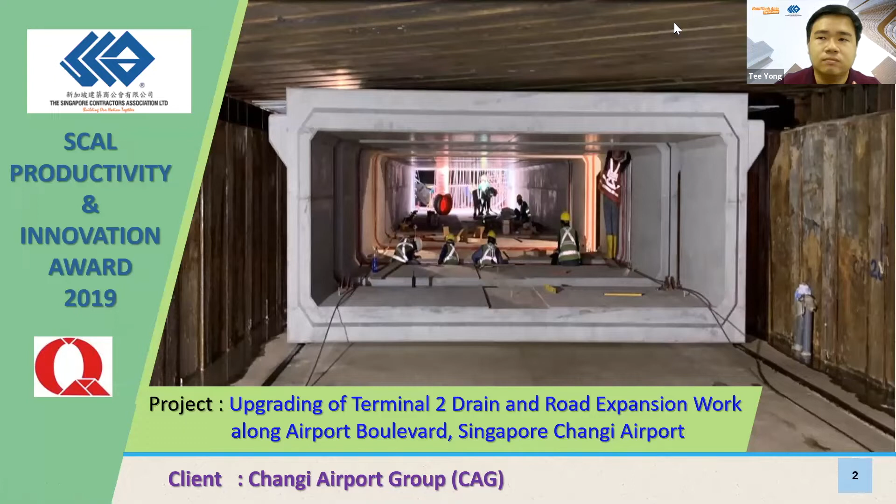So this is the length of the box culvert, which is about 51,100 mm across, going towards the direction of the airport and the upcoming Jewel during that time.

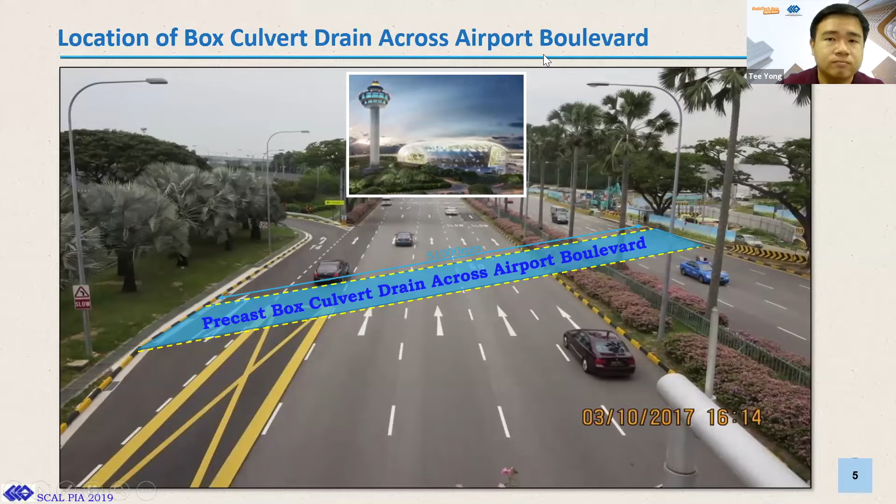The first initial method was using the consultant proposed method, which is the conventional way to construct. This design consists of a lower part precast box culvert followed by an upper part box culvert installation. The top of the culvert is actually higher than the existing road level for this design.

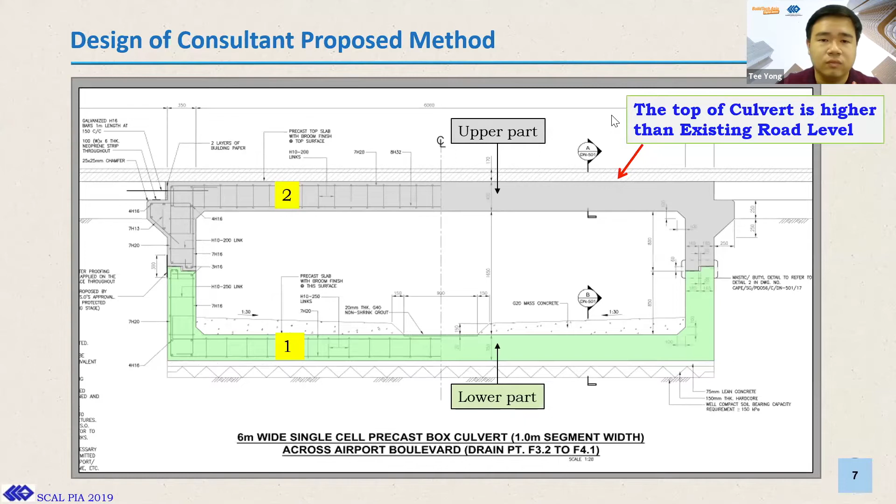Using this conventional method, we do the installation of temporary decking, followed by removal of decking for excavation, and then proceed with excavation to the required level. Then delivery of the lower portion of the box culvert, followed by backfilling, and then installation of the top section of the box culvert.

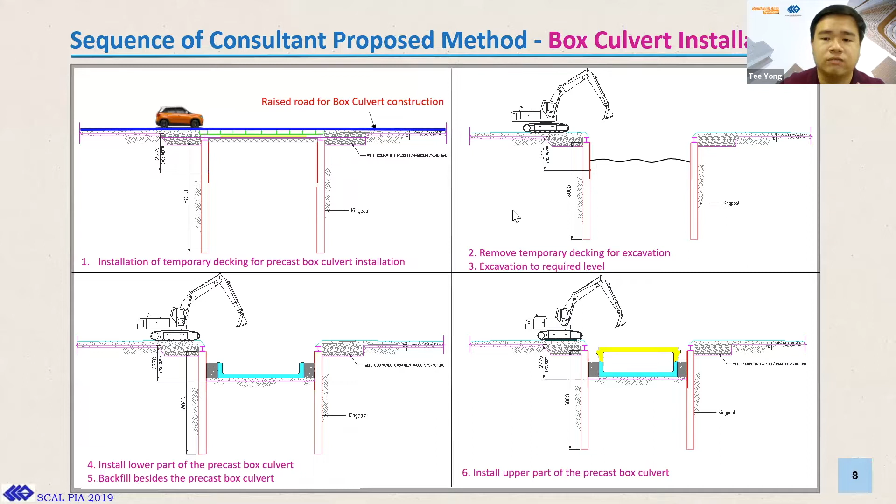Next, we proceed with placing the back decking system to open up the lane for traffic, and then laying of premix over the decking. Then we follow by removal of decking and premix to continue work, and backfill to the approach slab level.

During this portion, it is the most intense and time consuming, due to the opening and closing of traffic to allow for the next day operations. So this is part of our constraint for this project.

On the last portion, after completion, will be the removal of the king post and steel plate, followed by installation of the approach slab, and then the reinstatement works, which consists of milling and patching to the proposed level.

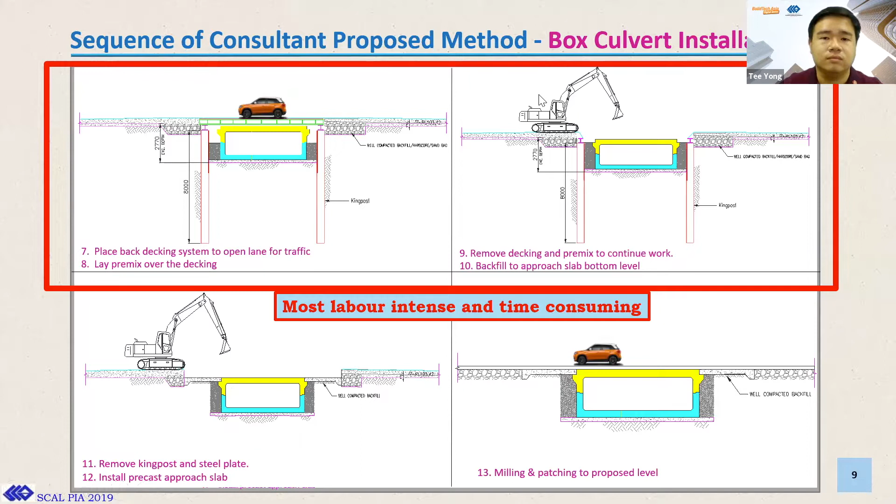Okay, so some of the challenges that we are facing - we have 4 main challenges if we use this conventional method to construct the box culvert along this Airport Boulevard.

First will be the repetition works, which require us to remove and reinstall back premix and decking, as we need to follow the permissible lane closure and lane opening timing to maintain the traffic flow.

Next will be the allowable lane closure timing, which is restricted for us. For day works, we are only allowed from 10 a.m. to 4 p.m., and for night works, we are only allowed from 1 a.m. to 5 a.m. So due to all these restrictions, there is a lot of repetition works required during our construction.

Next, if you look at the layout plan, this drain alignment is actually not perpendicular to the existing lane. So by using this method, we are affecting not just one lane in order to construct one box culvert - constructing one box culvert actually requires us to close more than 2 or 3 lanes. The last point will be the emergency lane opening.

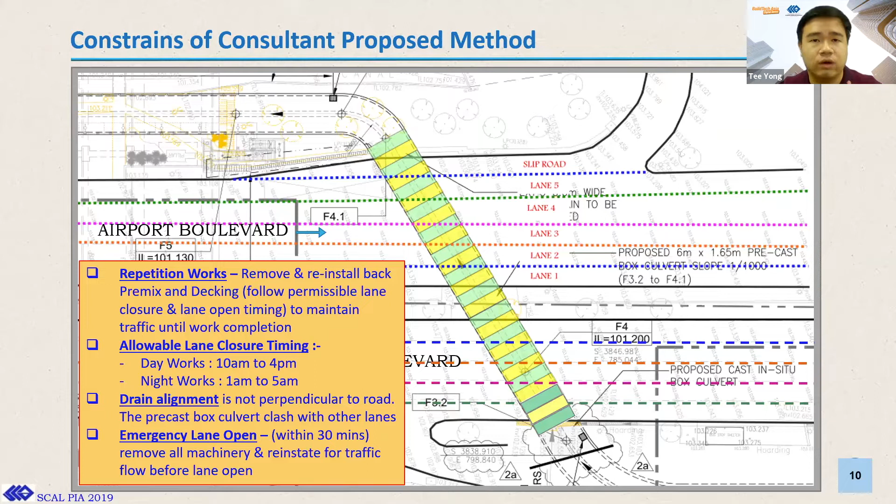We actually have to open up the lane within 30 minutes in case of emergency. So removal of machineries and reinstatement work for traffic flow before the lane opening will be a big challenge to us if we continue to use this conventional method.

So we have plotted a graph to analyze our challenges. In terms of method, if we proceed with the conventional way, the impact will be due to the small work window allowed by our client. In terms of environmental impact, we are only allowed to close 2 lanes at any one time. So this method will not be feasible for us.

In terms of machinery and manpower, it will also be a challenge, as this method requires us to do a lot of repeated steps for opening, closing, and reinstatement work, as we need to reinstate the top layer before we are able to open up to traffic. So all in all, if we proceed with this method, there will be impact to the existing traffic and also operations going to Changi Airport and the upcoming Jewel during that time.

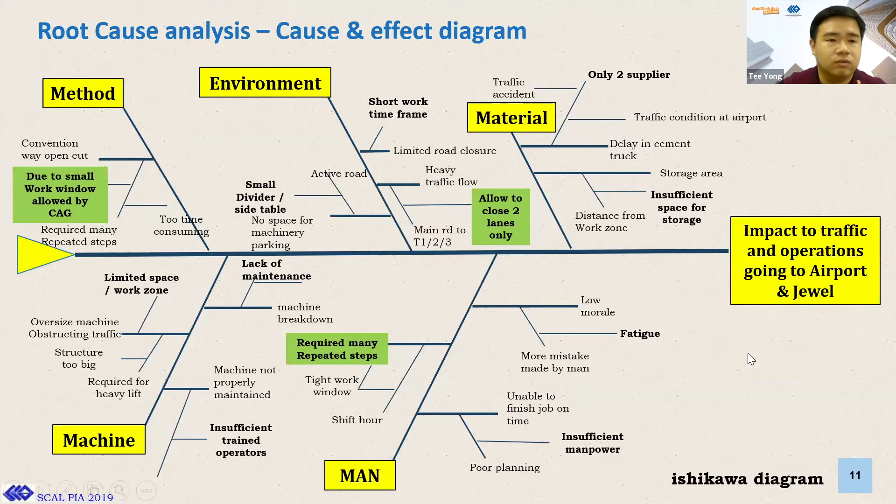So we analyze the root cause. We input 4 main points mentioned. The root cause will be restricted work windows given by our client, as this Airport Boulevard is a very important stretch going towards the airport, and for these works we are only able to close up to 2 lanes.

Due to the repetition works, road closure is also a big challenge to us, and we are also subject to airport emergency - we need to evacuate within 30 minutes so as not to affect traffic flow. So all these 4 main points are the main challenge for us, and the undesired outcomes will be delay to the upcoming Jewel opening during that time, and we will be facing LD from client and poor productivity.

So we have come up with a solution, which is to abort the conventional method and avoidance of above ground works and explore an underground method. What we have come up with is an innovative method, which is the pull and rail method. By using this method, we have no restriction to the 24/7 operations. So we are able to proceed with the excavation works and the installation of precast, without being affected by the restricted work windows and closure timing.

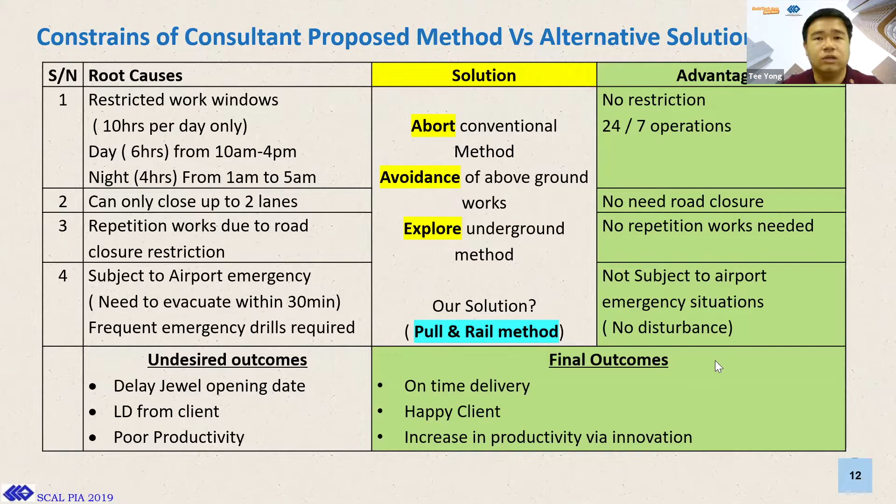So as mentioned, no need for road closure, no repeated works, and not subjected to airport emergencies. And the final outcomes will be on-time delivery, client satisfaction, and increase in productivity through innovations. So let us go on to our innovative method.

So this is what we have come up with, which is using this pull and rail sliding method for our full cell box culvert. The previous method was actually a lower portion and upper portion precast box culvert, but this time round, instead we are using a full cell box culvert, which also helps us increase our productivity.

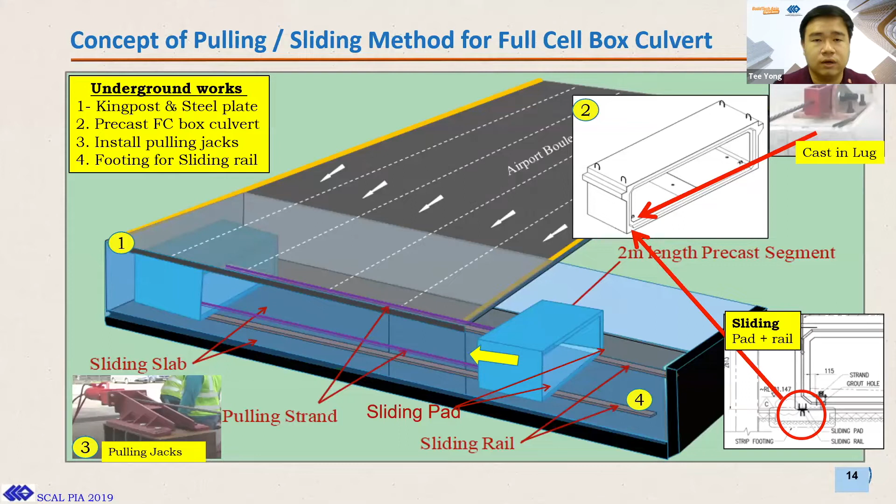So the first step will be the installation of the king post and steel plate, followed by number 2, the precast box culvert delivery to site to the receiving shaft, and below the ground, we will be doing the installation of the pulling jack and preparing the footing for the sliding rail. The next few slides will explain how these things work.

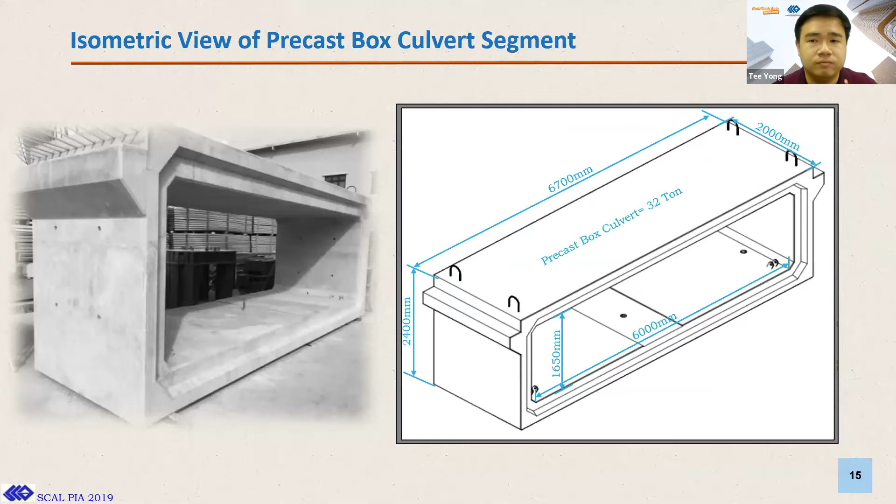So the box culvert segment is 6700 mm by 2400 mm. Each piece of precast box culvert is estimated to be 32 ton. So similarly, for this box culvert, the top of the culvert is actually higher than the existing road level. So our temporary works are actually much higher than the existing road level.

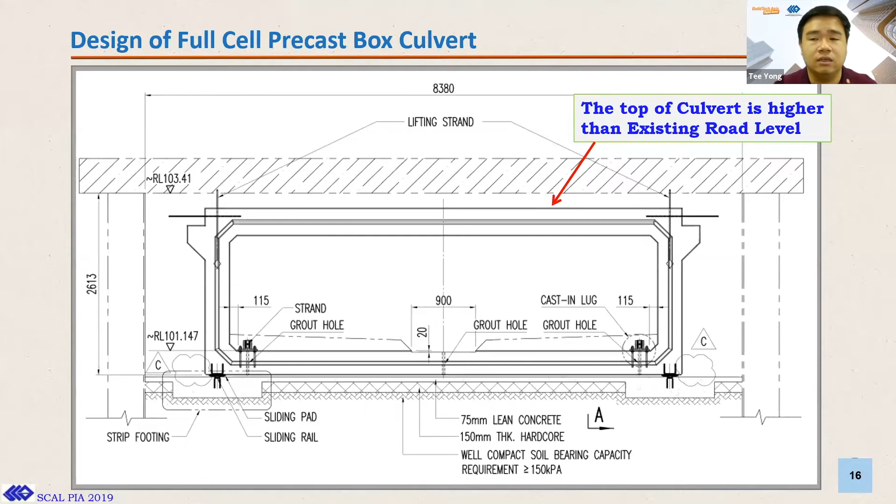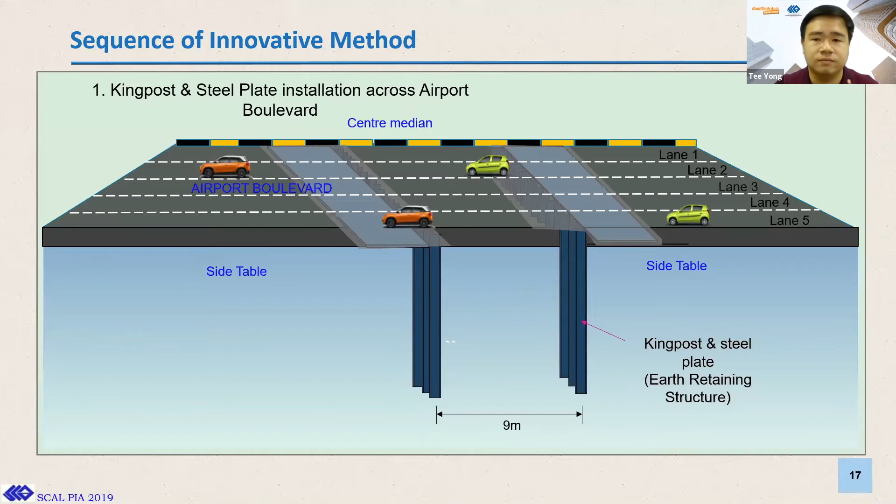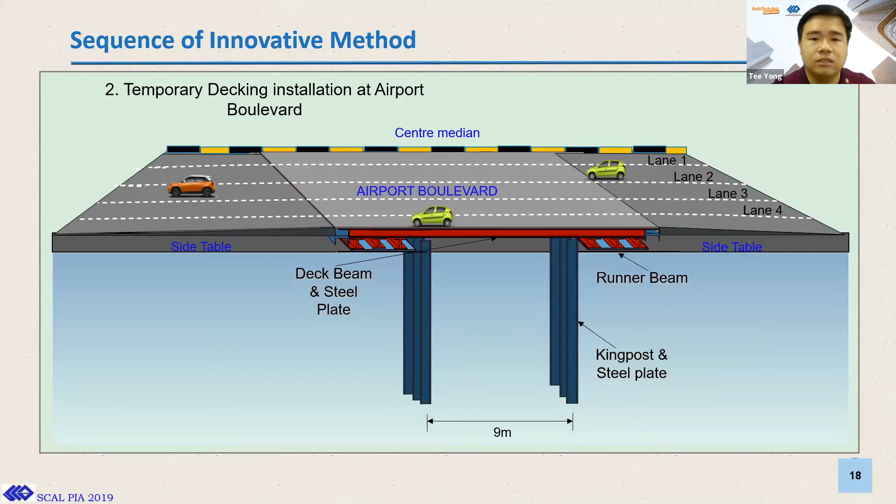So this is the diagram. First of all, we will proceed with the installation of the king post and steel plate, which is the earth retaining structure prior to our construction works. This portion will progress from lane 5, lane 4, lane 3, progressively to the other side of the road. After the installation of the king post and steel plate, we will proceed with the installation of the deck beam, steel plate and runner beam at the top.

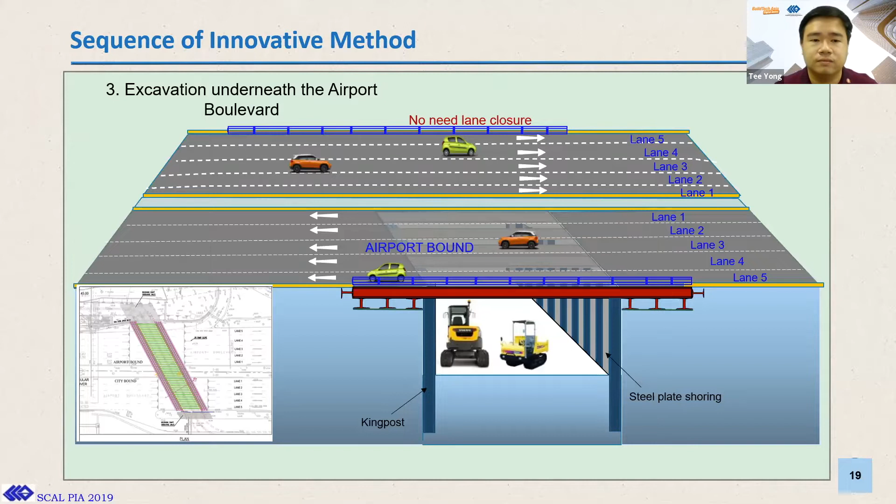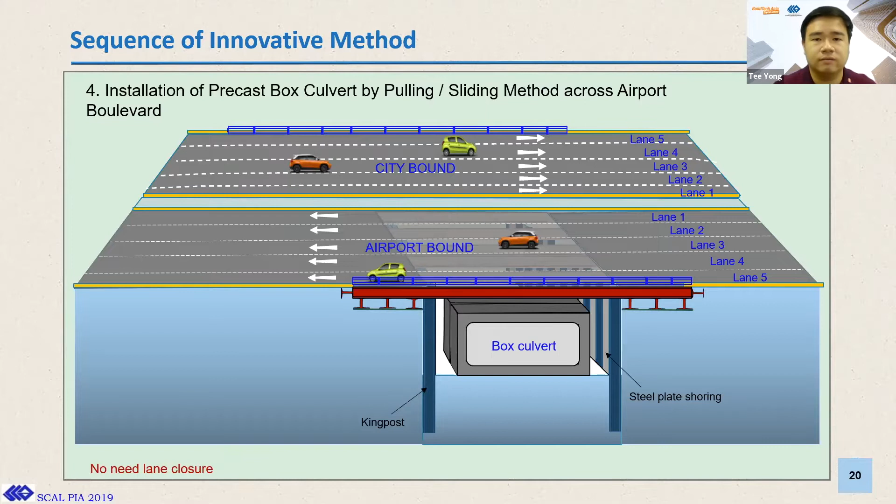Once we complete this portion, we are able to do our excavation under the ground and also proceed with the installation of the box culvert, not affecting the existing traffic flow anymore. So once the box culvert is delivered to the site, it will be placed down from the receiving shaft and then pulled in using the sliding rail and pulling jack. Once it's complete, we will proceed with the removal of the steel plate decking and then complete the reinstatement works.

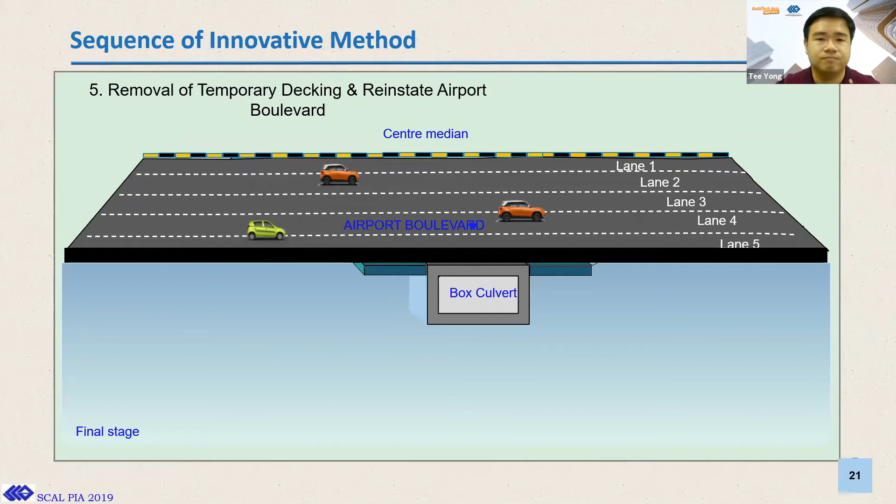So let us do a comparison of the consultant proposed method and our Q&Q innovative method. As mentioned, the 4 main points: by using the conventional method, there will be repeated steps. But by using our method, the decking and premix is only installed once and there are no repeated steps, as opening of decking is no longer required. With the conventional method, we actually have to open up and close even for the excavation and for the placing of the precast segment. But with this innovative method, after we install the decking, we no longer have to open up the decking as we can do our works underground.

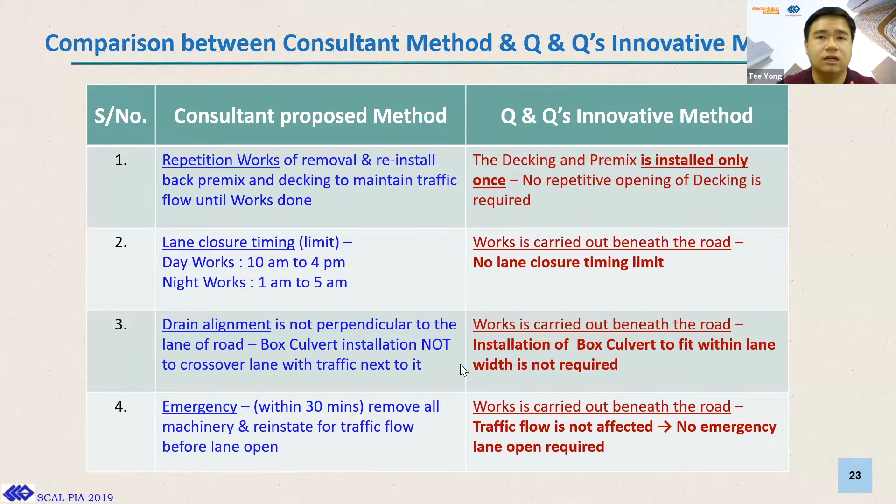So next point will be the lane closure timing. With this innovative method, works are carried out beneath the road and we are not restricted by the lane closure timing anymore during the excavation and the installation of the box culvert. For drain alignment which is not perpendicular to the lane of the road, box culvert installation is not to overcross a lane with traffic next to it. But by using our innovative method, fitting the box culvert within the lane width is not required because we are doing our works underground. For point number 4, similarly, we are not restricted as we will not be affecting the ongoing live traffic flow.

In terms of productivity comparison, we will take a look at point number 5 and number 6, which are majorly helped by this innovative method. For the excavation work, the conventional method requires 60 days to complete. But with this innovative method, we are able to complete the whole stretch of excavation works in 37 days. And for the installation of precast segments, the conventional method takes 36 days, but with the innovative method, we are able to complete it within 18 days.

Also take note, for the installation of the precast segment with the conventional method, the precast segment actually consists of a top portion and a bottom portion, and the connection also requires time for the connection and grouting works. But with this innovative method, we are pulling a full cell box culvert, so there is no joint between the top and bottom section.

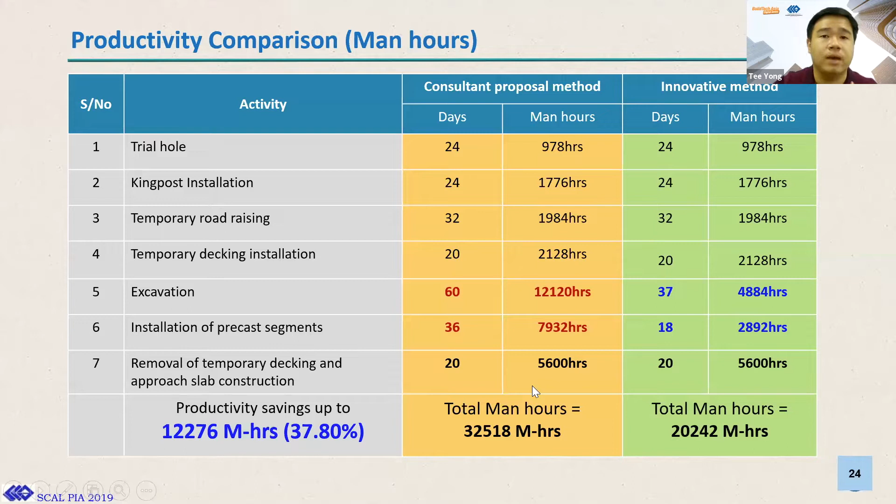So overall, we are talking about productivity saving of 37.8% in terms of productivity for man hours. Next, we will go on to asphalt saving. Similarly, for point number 5 and 6, if we are using the conventional method, we have to open up and close back the decking, and then do the reinstatement work every day for us to proceed with the excavation and the installation of precast segment.

But by using this pull and rail method, this portion, excavation and installation of precast segment, doesn't require us to do an opening and closing of the top decking. So this portion does not require us to do the reinstatement work. Therefore, for this portion, we do not require any asphalt here. So in terms of saving, we are talking about 27.91% based on our study.

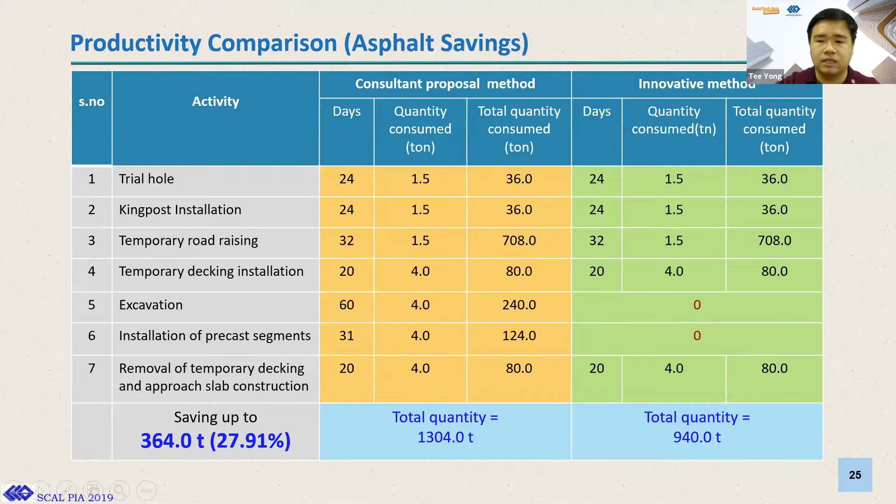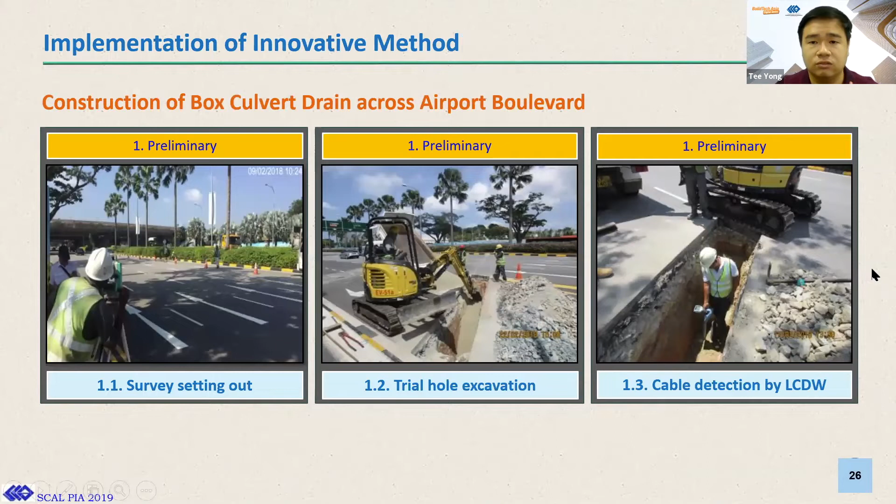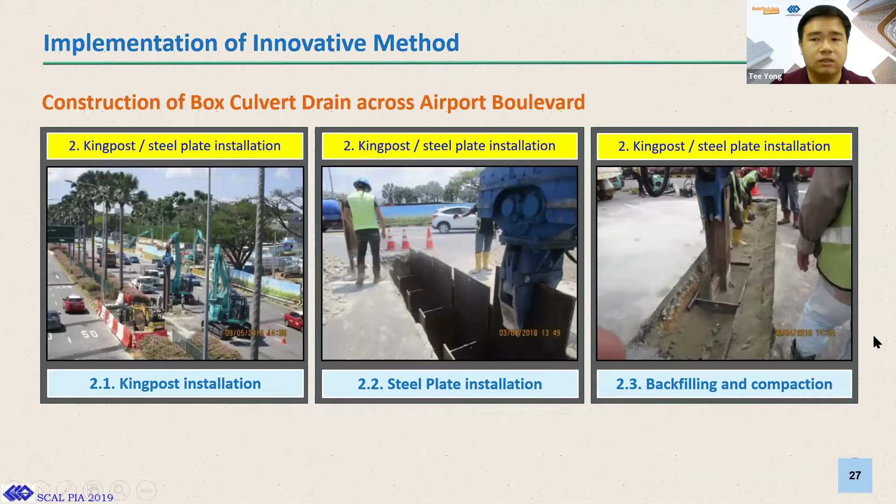So let us go on to some actual photographs of the innovative method. First, we proceed with the survey setting out, followed by trial hole excavation and cable detection by LCDW. As this drain alignment is not perpendicular and slightly slanted, the alignment and precision has to be very accurate for us to install the I-beam. So next, we will proceed with the installation of the king post, the steel plate installation, and backfilling work and compaction.

So after the installation of decking, the excavation works and the installation of the precast box culvert will be underground. So this portion will not be affected by the existing live traffic flow at the top. First we proceed with the excavation, shifting of the excavated soil to the shaft and removal. Once we complete this portion, we'll proceed with the casting of the slab and preparation of the pulling rail.

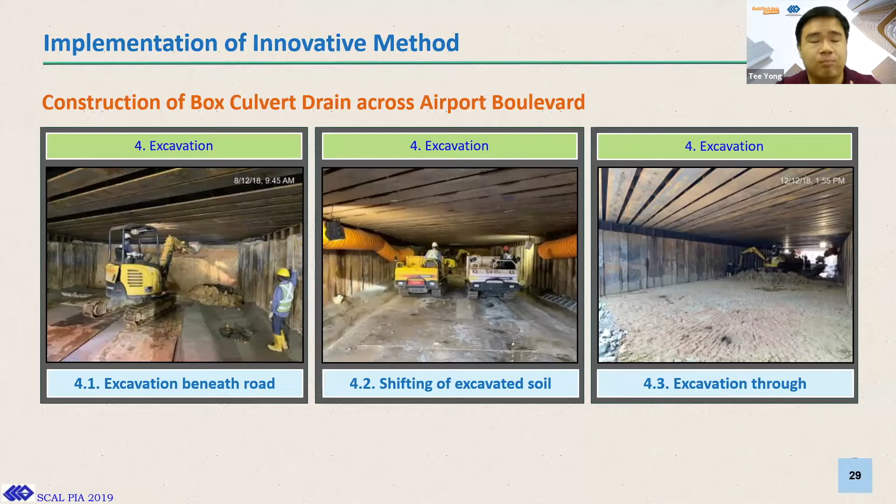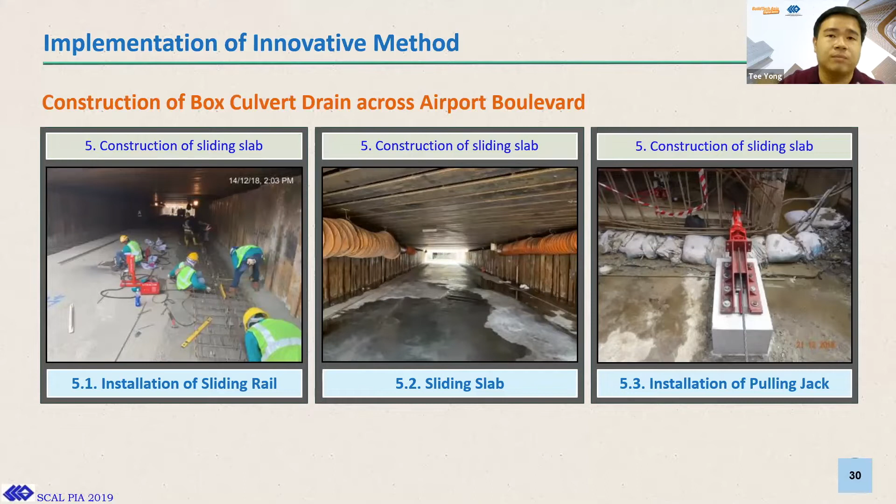So from here you can see the first diagram. The precast box culvert is being delivered to the site and then hoisted down to the receiving shaft. Once the precast box culvert is below the ground, we will proceed with the alignment. On this portion, the alignment of the two rails and the placing of the box culvert on the rail has to be very accurate and precise. And the pulling speed on the two sides using the jack has to be very accurate, and the timing has to be very precise as well.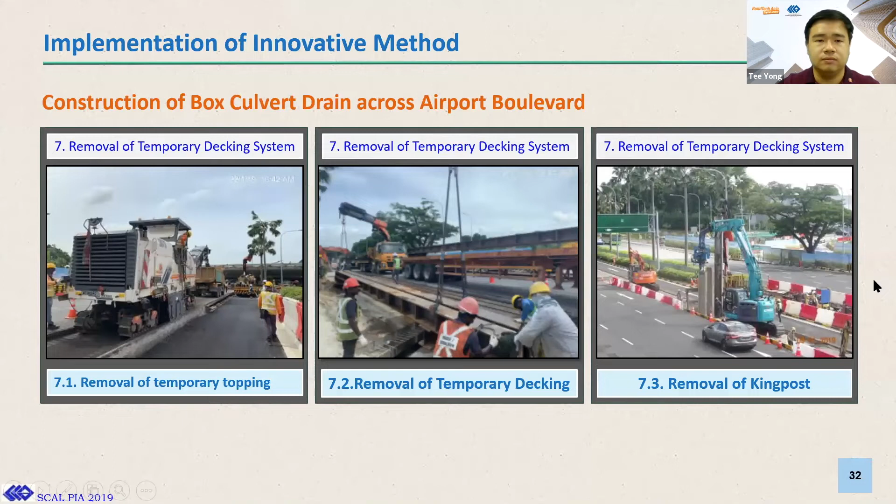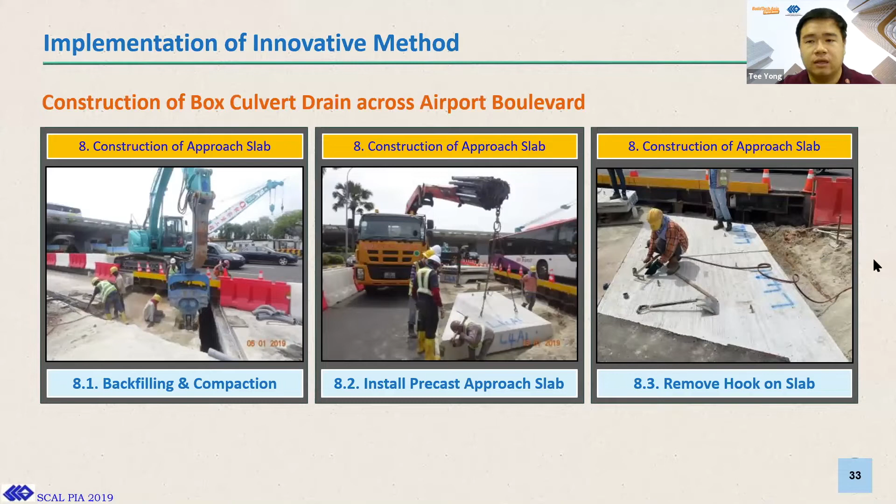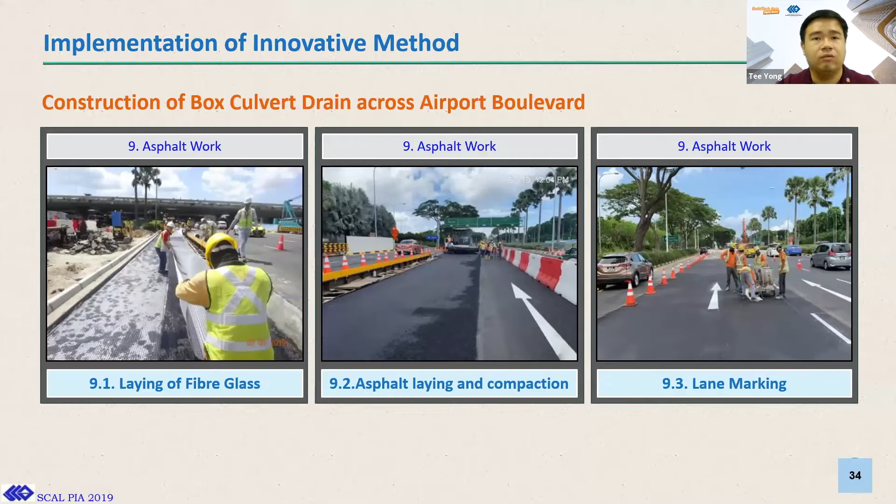Once we complete the removal of king posts, we proceed with the compaction works and delivery of the precast approach slab. Then we will complete the final stage, which is the asphalt laying and compaction, followed by the lane marking, and it is ready for usage.

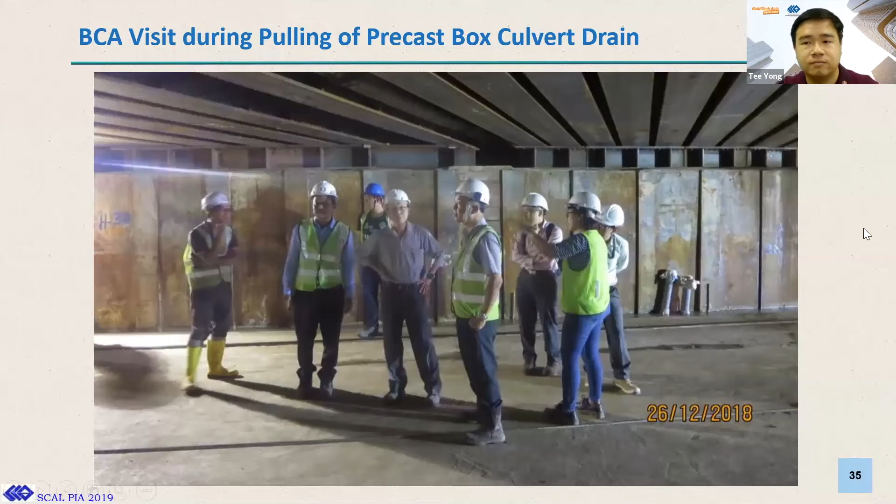In terms of intangible benefits, this method has helped us to enhance our corporate values and mindset change as we are able to embrace innovations and enhance engineering competency, and it's of extremely high operational worth as we are able to also use this similar method in other upcoming projects. And in terms of environmental sustainability, we are able to minimize resource consumption and maximize resource reuse. We are able to reuse the asphalt.

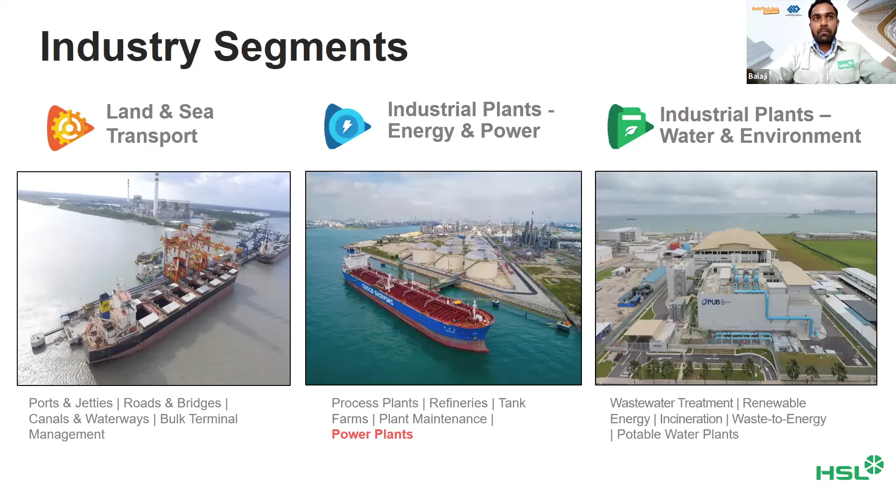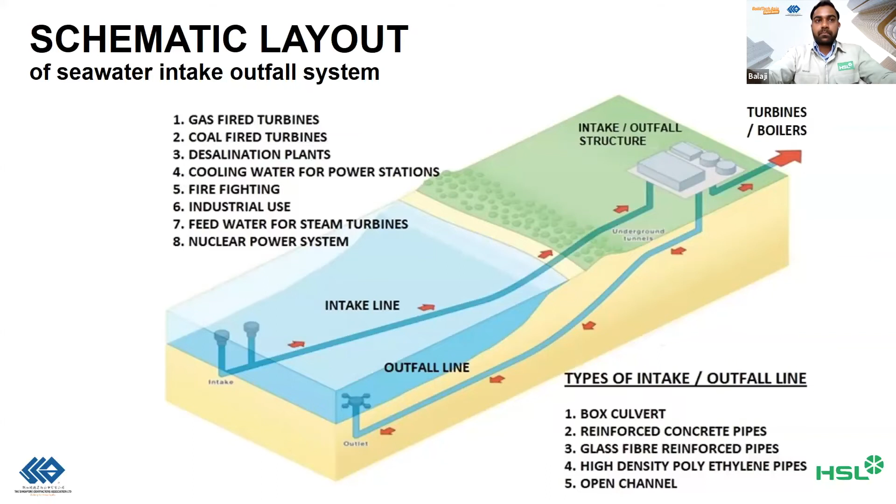What are the various types of intake and outfall systems? Intake and outfall can be done in various ways. One is through box culverts, one is through reinforced concrete pipes, another is GRP pipes, and high density HDPE pipes, and the last is the open channel method. So these are the three major types in the intake outfall system.

As I explained, the box culvert line, you can see in the first picture; using the box culvert, we can transfer the water for the cooling water systems. Second is the GRP, RCCP, and HDPE, either of these pipelines, in the second picture. And third is the open intake or open outfall. In this picture, you are seeing the open outfall system.

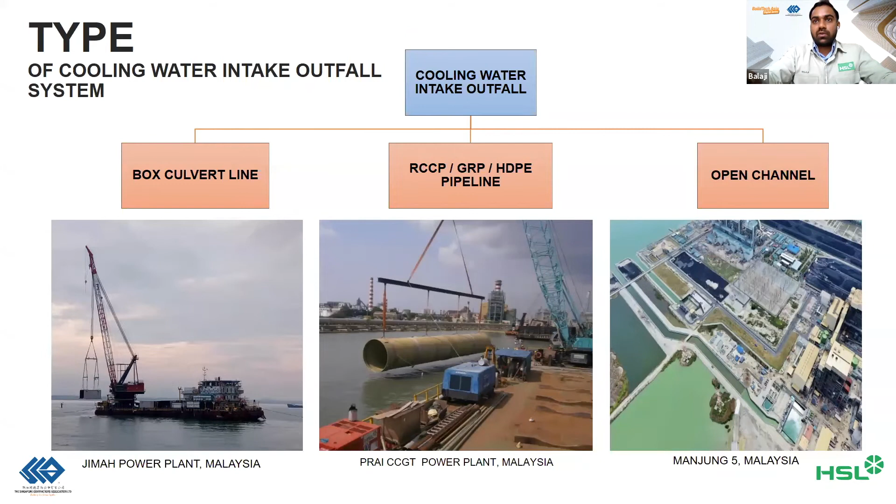We used the conventional type of installation, using crane barges and conventional cranes to install the box culverts. These box culverts weigh about 300 tons, and the number of box culverts is also close to 300.

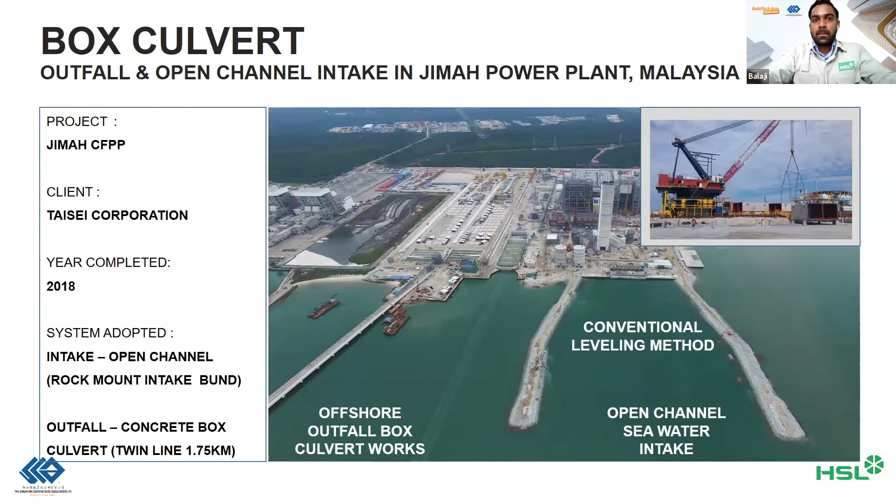Next is an example for the open channel, which is the discharge system we did in Manjung Power Plant, Malaysia, under the client Samsung C&T. The year completed is 2016. The system adopted is outfall open discharge.

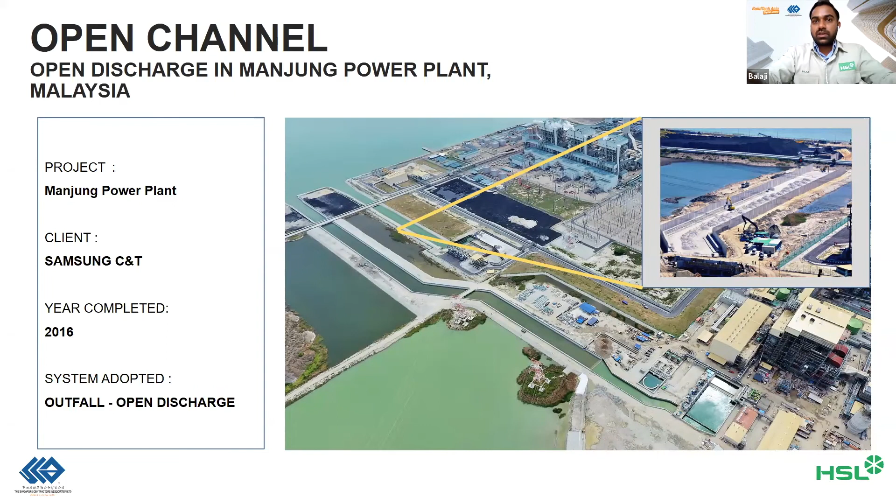The next example is the pipelines. In this pipeline system, this example is from the Prai CCGT under Samsung C&T. The year completed is 2014. Here there are two GRP pipelines of 3.2 diameter, about 500 meters long. Here the outfall system is the open discharge system.

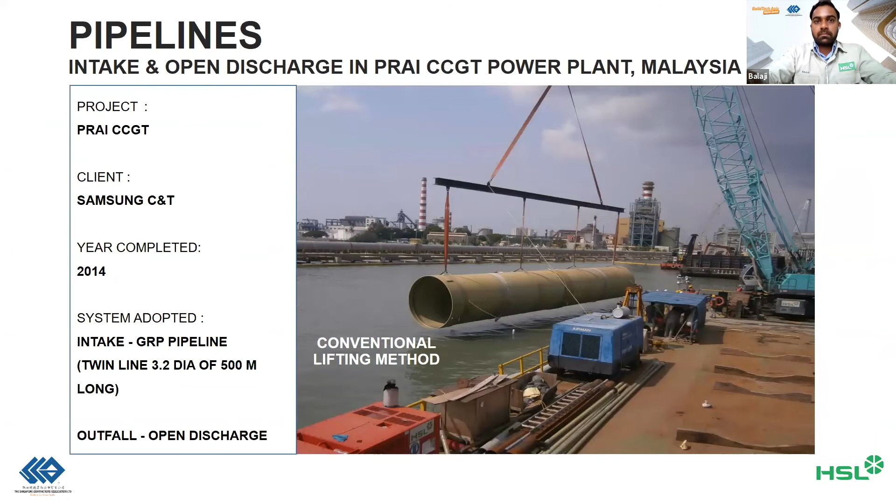In all these power plant projects, we have faced some difficulties and also some challenges. First I would like to explain the challenges we faced in Jimah power plant. In Jimah power plant, we did the conventional bedding. For the pipe or box culvert installation, we need the seabed to be level properly, and it should be bedded using either stones or gravels. In this method, we used the conventional type of bedding, using the crane barge. You can see the disadvantages of this system are the turbidity effect, inaccuracy, and high wastage of materials.

After we do the bedding, we need to do the leveling. In order to place the pipeline or the culverts in position, we need to make sure the seabed is level. In the initial days we used divers to go and do the leveling manually. This is more time consuming, the precision is very low, and it exposes divers to high risk.

After the seabed leveling, we need to install the pipelines or box culverts in place. In this particular power plant project, as I mentioned, this is a 300-ton culvert. So we used heavy lifting equipment, the conventional type of cranes, for installing the box culverts. We used 4 tugboats because the barge is bigger in size; the load of the culvert is big, so we need big crane barges to do the installation.

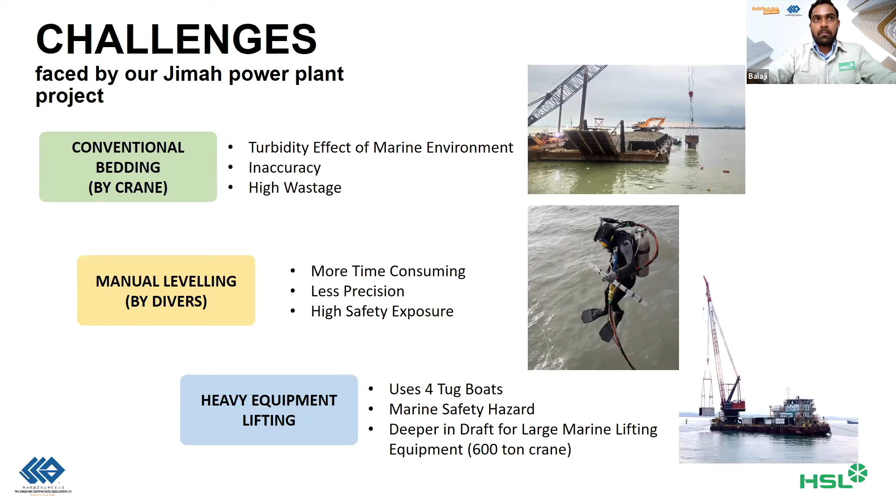So we decided it's time to put our heads together and bring some innovative solution to construct this kind of box culvert and heavy lifting objects. Our main objective of this idea is to improve by reducing manpower, reducing equipment usage, and minimizing time.

Second is to develop things such as using the louvers for bedding; later I'll show you some pictures and videos. Also using multi-screw levelers, developing GPS positioning for accuracy in positioning, and having a multi-beam surveying system to analyze the seabed.

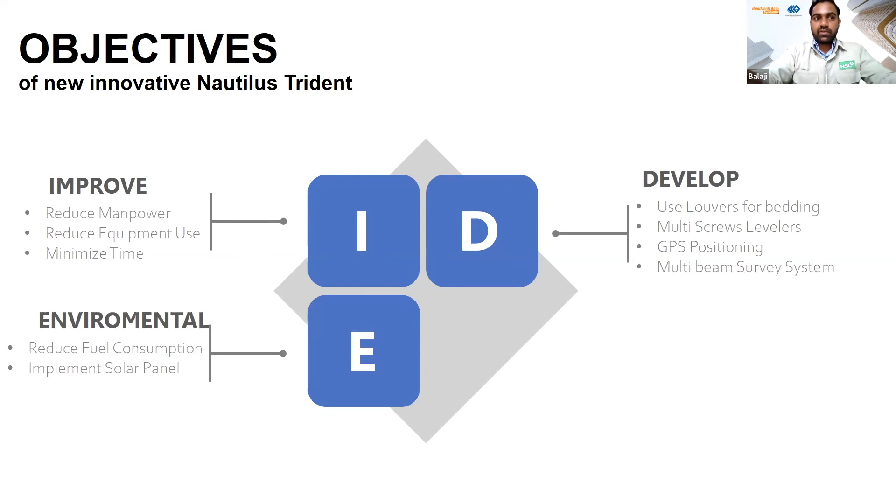Third, it should be environmentally friendly. So to be environmentally friendly, we need to reduce the fuel consumption first, then implement the solar panels.

Then the fourth objective is the advanced safety systems: to minimize diver deployment, to have the live monitoring surveying system, a real-time monitoring system, and also minimize the tug movements. As I mentioned, we need to have 4 tugboats to handle the bigger barges. And to eliminate the poor diver visibility. Normally in offshore working, we always face this problem, which is the poor visibility of the divers during the installation of pipelines or culverts.

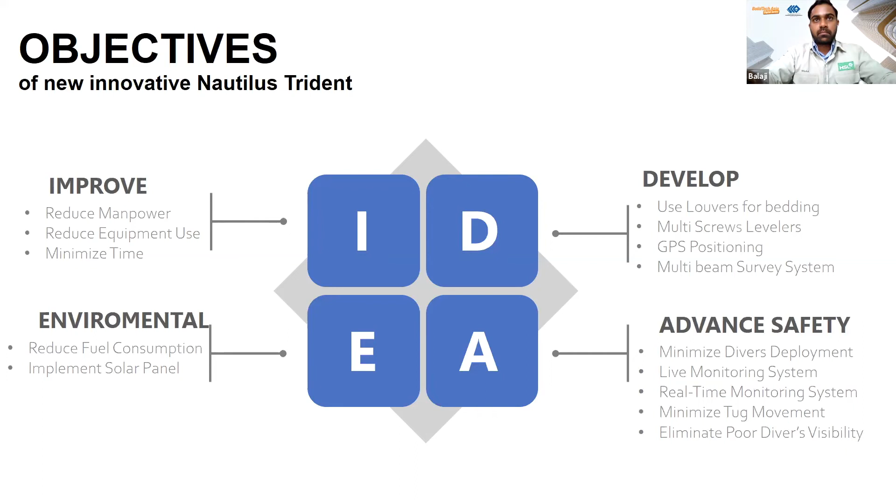Okay, let us see the Trident barges. The Trident barges are 3 in total. One is the bedding barge, second is the leveling barge, and third is the heavy lifting barge. So we see the bedding barge first and its advantages. So this is the Trident bedding barge. We have louver gates opened by a hydraulic system, which supports uniformity in bedding.

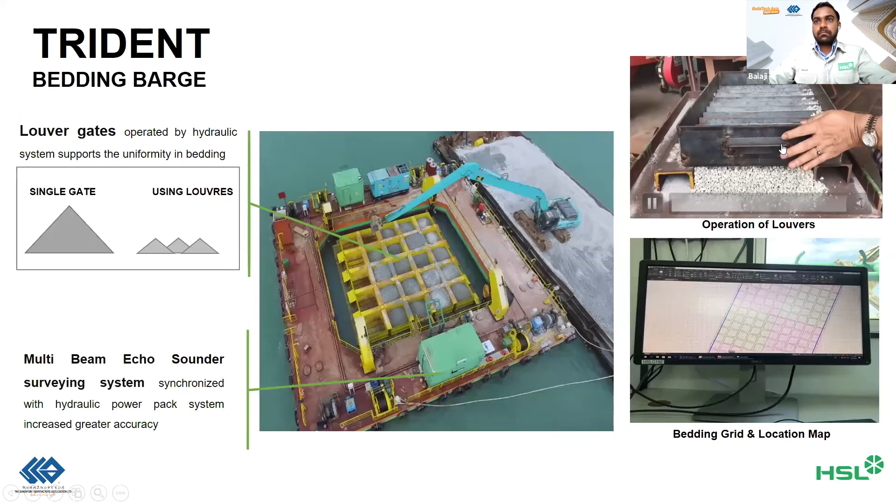You can see the advantage of the louvers in this. On the top right side, you can see the louvers working system. This is the model that we demonstrated before we went for the innovative Trident. You can see the evenness during the bedding. So the same system is applicable for this bedding barge.

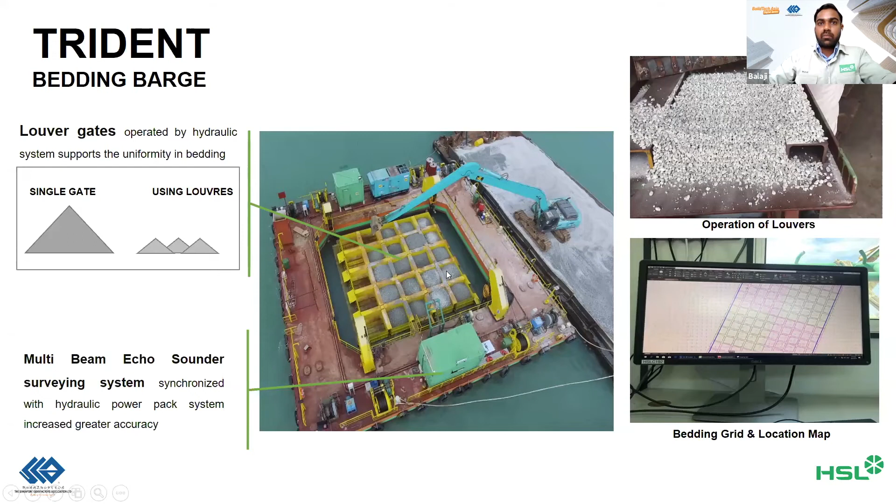So we plot the bedding grids in our layout, and by using the echo sounding system, we measure the quantities to put inside each box, and the bedding frame will be lowered down.

Second is the Trident leveling barge. After we do bedding, we need to do the leveling, because in order to minimize the ups and downs in the bedding, we use the leveling. This one also has continuous improvement. Initially we used a blade kind of leveling system. After that we innovated and continuously modified our system in order to increase the accuracy and also the efficiency.

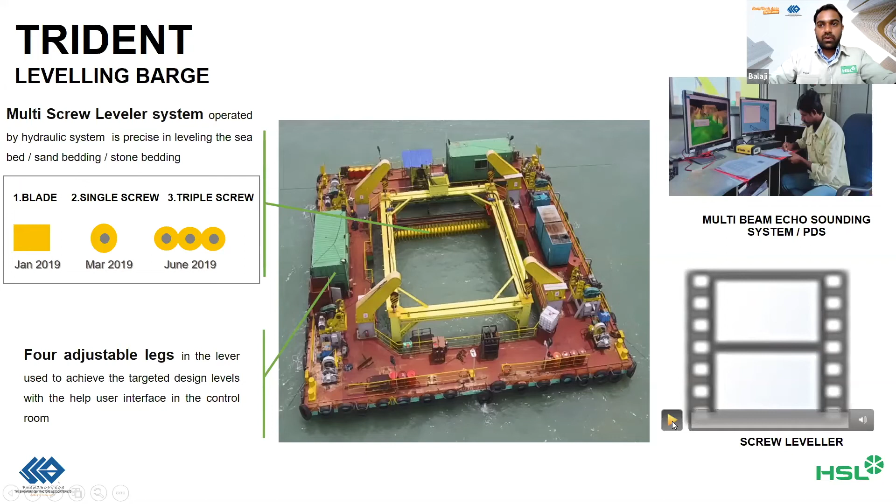In March 2019, we went for the single screw leveling system. That was followed by the triple screw leveling system in June 2019. So you can see the 4 adjustable legs in the leveling barge. These are to adjust to the required design levels. We can adjust the 4 legs using the hydraulic system, which can be operated from the barge. I can show you one more video of how this leveler is functioning.

Third is the Trident gantry barge. So this is the barge that I'm talking about, which can be used for heavy lifting activities. There are many advantages and many innovative things that we incorporated in this barge. First, the gantry crane barge of 550 tons safe working load with highly automated systems. Second is the rail cart of 500 tons.

You can see the rail cart, which is yellow. This one is to transfer the load to the desired location on the barge. So you can place 4 or 5 pieces of cargo on your deck, and this rail cart system will be used for carrying these loads towards the crane.

Third is the counterweight rail cart system. In olden days, we used manual pumps and water for ballasting the barges to keep the barges level during loading and lifting. Now we have this counterweight rail cart system, which is instantaneous. Based on the level and the stability of the barge, this counterweight is moved in the opposite direction to maintain the barge stability.

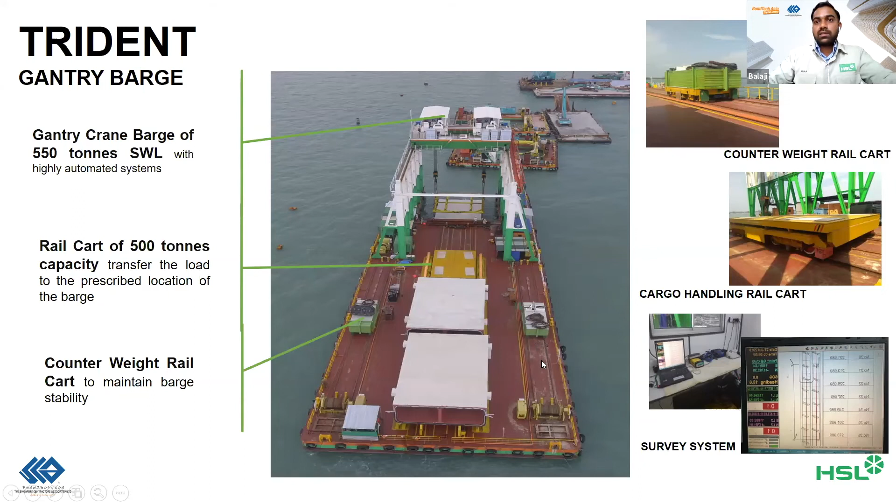So these are the other applications of the Trident gantry barge, GB in short form. You can see box culverts, then we can install intake headers, and we can install even the pile caps for the bridges. It can also be used for installing beams, and for installing the artificial coral reefs, which we use in our Singapore projects.

So we also made the graphical presentation for comparing all these environmental cost efficiency of this Trident with reference to the conventional projects, starting with fuel consumption. Here you can see for the Trident barges versus conventional systems, it decreased more than half of the fuel consumption when compared to conventional systems. This comparison was made comparing our Jimah project versus our Melaka project.

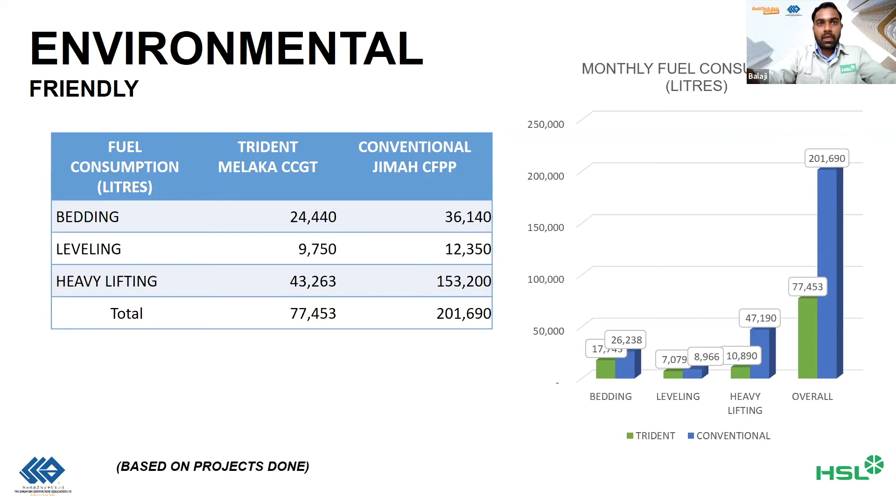Second is the number of equipments used. For bedding, we have 7 numbers of equipment, whereas for the conventional system, these numbers show how many equipment like tugboats and barges are used to do this activity. Overall, it reduced about 20 to 25% of equipment for this Trident method.

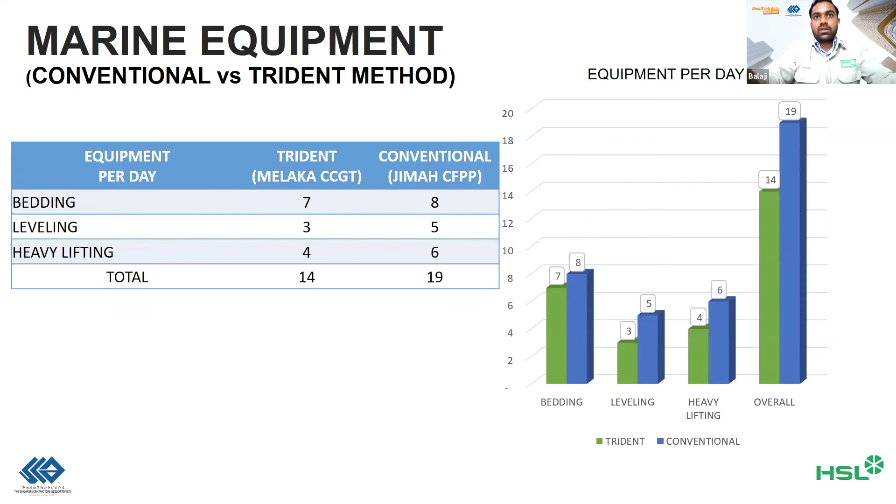Manpower: since the usage of divers is minimized, here you can see the numbers of manpower used for this Trident. Almost 35% of manpower is decreased by using this Trident.

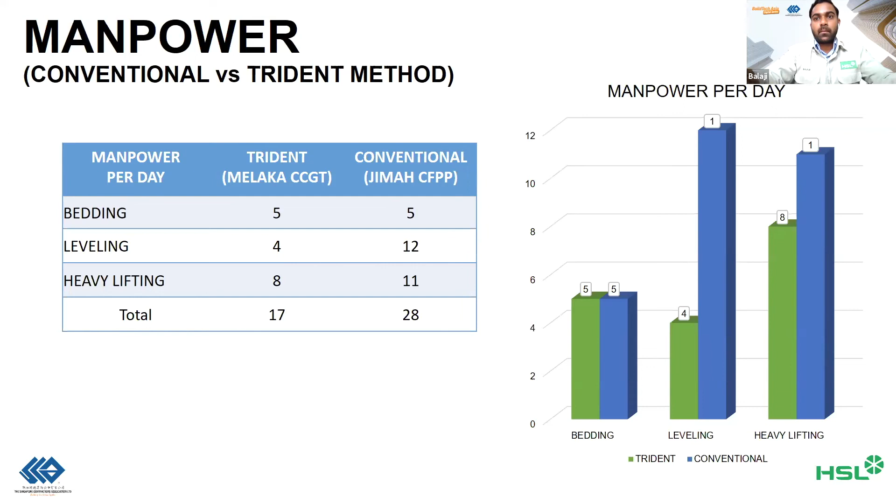For productivity, for the bedding activity we reduce almost half of the time doing the 100-meter square of bedding area, because in the conventional system we use manual cranes to do this bedding activity, whereas this bedding barge is much faster. For the leveling, we use divers in the conventional system, but here we use the mechanized system and robotic equipment to do the underwater leveling.

Third is the heavy lifting. Here also we reduced our time by almost more than half for installing the culverts, since the barge movement is much easier compared to the conventional type of cranes.

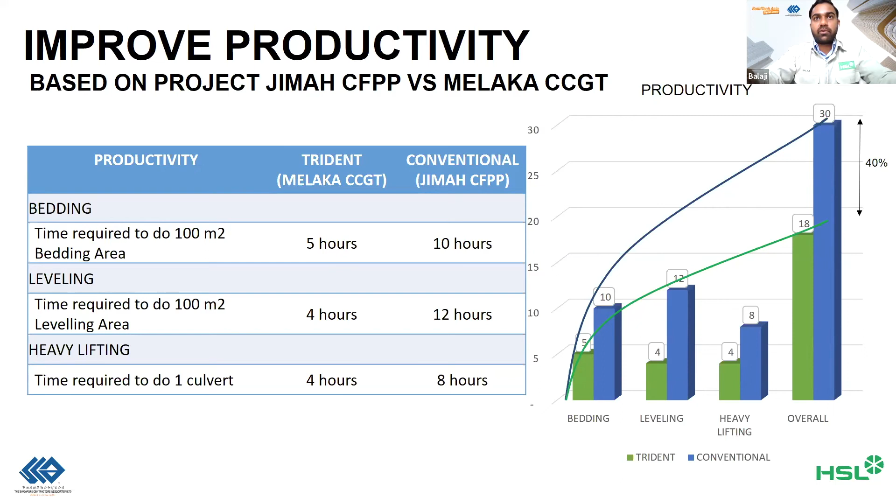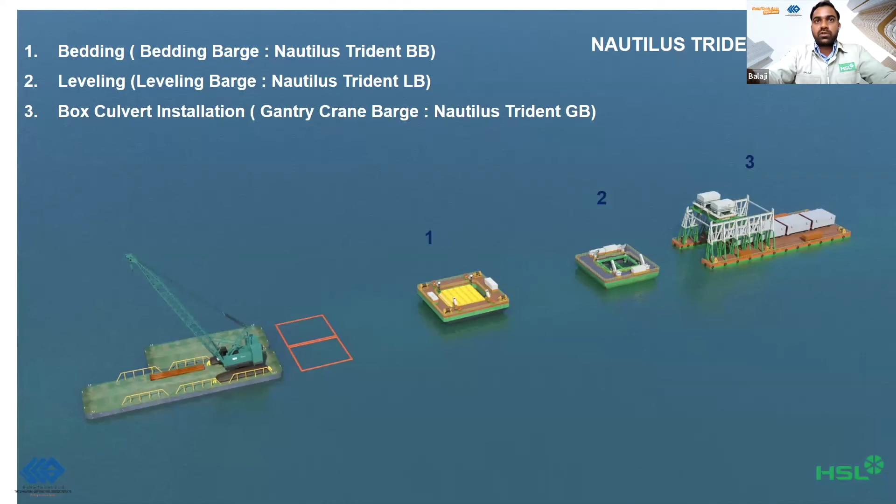This is the sequence we normally follow. You can see barge number 1 doing the bedding, barge number 2 doing the leveling. After that we install the pipelines or culverts. For this particular project we used culverts. I will show you a video.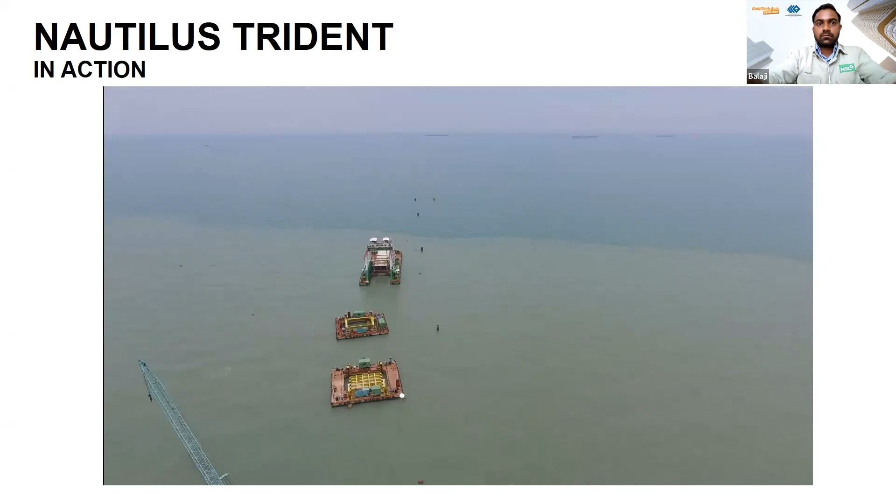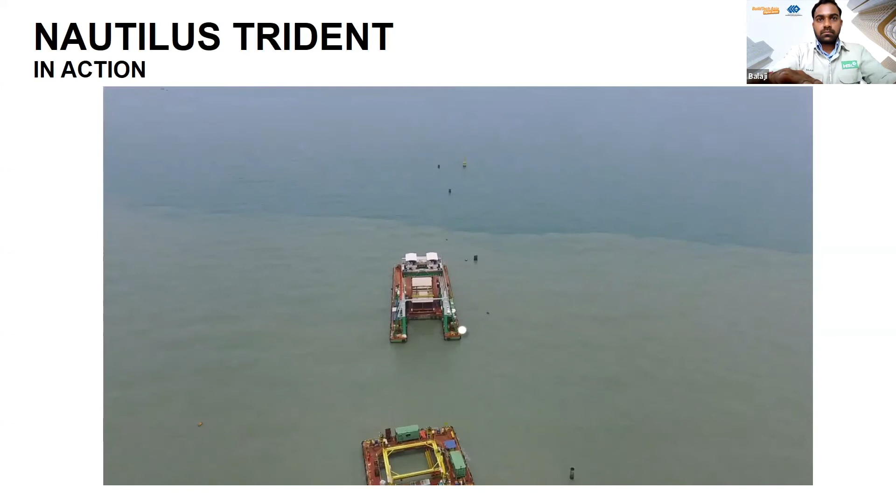First is the bedding barge. This is how we do the loading of materials, using the material barge alongside the bedding barge to load the materials. Based on our survey calculation, we already determined earlier how much quantity needs to be put in each box, and based on that, we fill in the boxes.

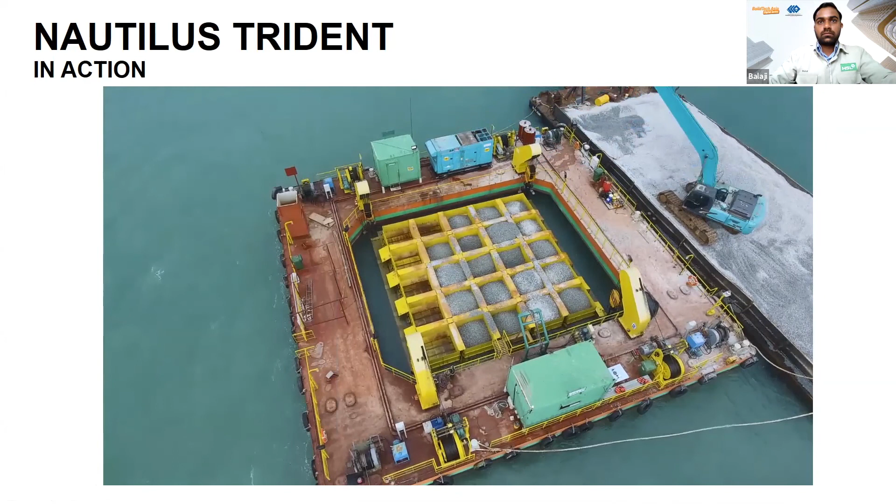After that, we lower the frame as shown in the video, and we dump all the bedding materials in the trench.

After doing the bedding, we position our leveling barge based on the GPS positioning system to the exact location, and we do the leveling afterwards.

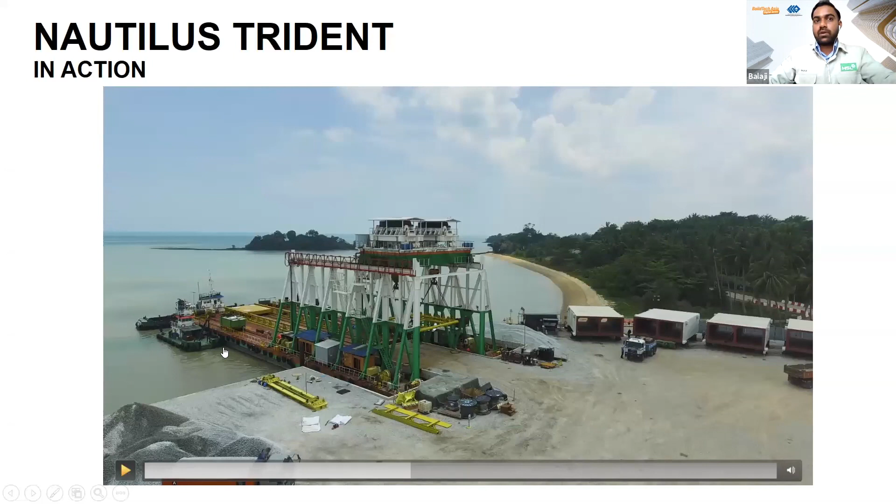This is our third barge, the gantry barge. The draft of this barge is less than 2.5 meters, so it can navigate shallow water easily. You can see very few numbers of tugs are needed to handle this barge when compared to conventional crane barges.

I'm sorry, Balaji, could you finish in about 2 minutes? Thank you. I'm sorry, Balaji, can you finish in 2 minutes? Thank you. Okay, sure.

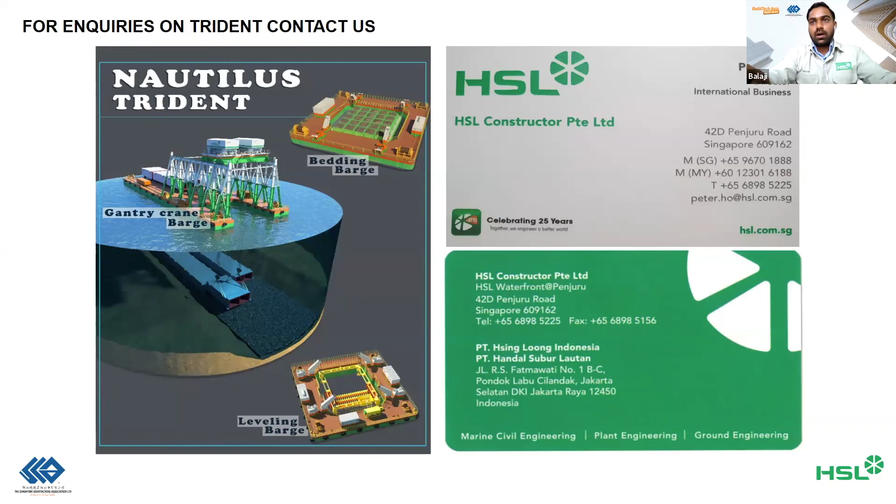These are some of the working pictures of our Trident barges. These are the references - for inquiries, you can contact us for these barges. These barges are currently in Malaysia, so they can work anywhere. Thank you.

Thank you very much, Mr. Balaji. I think this is another clear example where innovative ideas can be generated internally, overcoming the elements. Today we have heard two excellent examples, the gold and silver winners of PIA 2019. There are many others, and I think our purpose here is to show the industry what is possible and how innovative ideas and projects can be developed in-house with very good results.